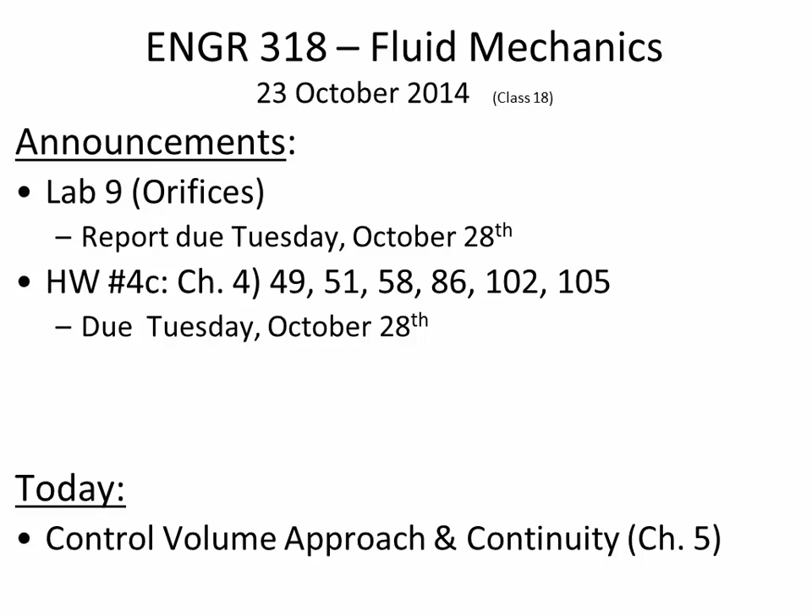And so Chapter 5 is also pretty important, and there's going to be different combinations of principles from Chapter 4 that will be combined with things from Chapter 5 to come up with interesting combo-type problems. So it's going to start to get a little more complicated and interesting, though nothing to be intimidated or scared by. It's just that we're going to have combo problems where you have to remember one chapter and integrate it with what is included in the next chapter.

All right. I don't think that we talked about this key idea slide from the last lecture; we didn't get to the last slide. So on the homework assignment you've got due on Tuesday, problem 51, there is a piezometer that's connected to a pipe that has a contracting section. We've talked about this extensively, and you've seen it in the lab, that a contracting section increases the velocity. So where the pipe diameter is wide, the velocity is 10 feet per second.

And the velocity here at the contracted section isn't known because they haven't told us the pipe diameters. If they'd said what the diameters were, then we could just calculate that velocity directly. But instead, we have piezometers measuring the piezometric pressure at both locations. Now, what would the water levels be if there was no water flowing through this pipe? If it was just static conditions, would there be a deflection like that? No. The deflection is only because water is flowing. If it was static, the water levels would be the same. So the fact that it's deflected tells us that the water is moving.

So the pressure here at the wide section is bigger than the pressure at the throat. And how do we know the pressure is higher at location 1 than at location 2? It's because the water level rises higher in that piezometer. These piezometers are an indication of how much pressure there is at a certain location. And so the process here is to combine the measured deflection between the two, along with the definition of piezometric pressure, into Bernoulli's equation.

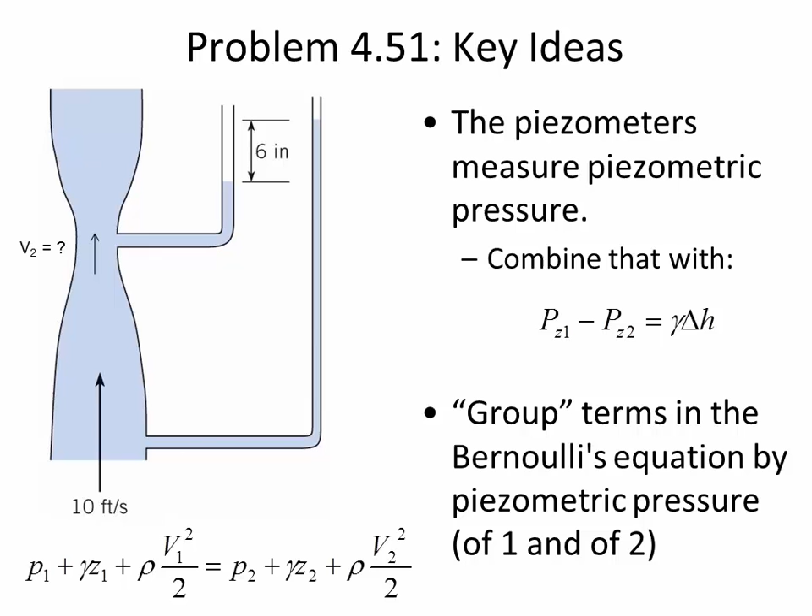All right. Here's an aerial photo of the fourth largest artificial reservoir in the United States. It's the Oahe Dam and the Oahe Reservoir. It's in South Dakota. The reservoir actually stretches more than 100 miles up the river. It sort of dams and pools a couple of rivers that converge together for quite a long distance, and it has a storage volume of 23 million acre feet.

We talk about units a lot in this class, but we haven't talked about an acre foot yet. What do you suppose an acre foot is measuring? Foot is a unit of length. What's an acre? It's area. So if you multiply length by area, what does that give you? Volume. So this is a measurement of volume, and what it says is if you had 23 million acres of area and there was 1 foot depth of water over that 23 million acres, that's how much water is in

this artificial reservoir. So this reservoir isn't 1 foot deep everywhere. Some places, like probably right at the dam, it's maybe 40 or 50 feet deep. Near the end of one of these little inlets here, it's probably just a few feet deep by the shore. So if you integrate the many different depths and consider the entire area of the reservoir, it's saying that the volume of that's 23 million acre feet.

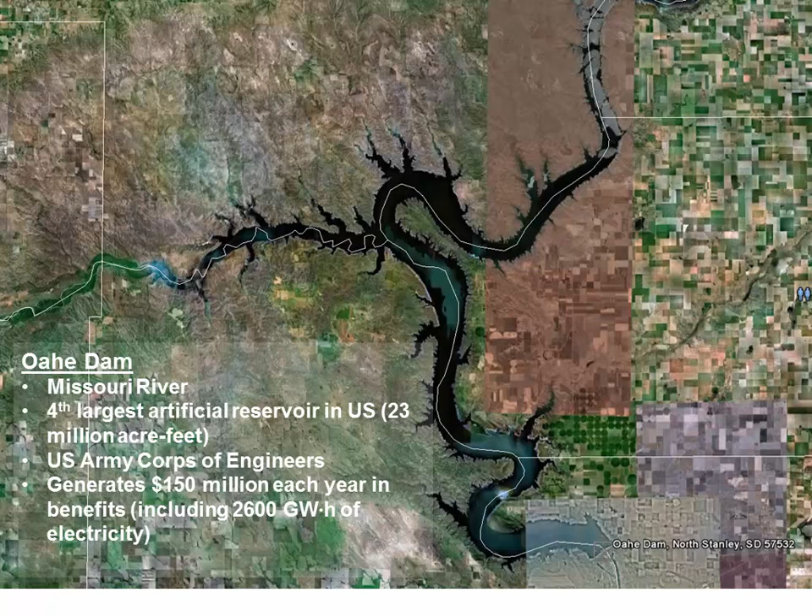Here's a close-up of the dam itself and some of the hydraulic structures they've built along with the dam. You can see here's the intake. The water going through the outlet, it's not like they just put a pipe right next to the soil on the dam. Do you have an idea of why they would not want the inlet, like a big pipe, right at the face? That's exactly it. If you've got the water going into that pipe at a really fast rate, then it could scour.

Let's draw it: here's the dam. The problem with having a pipe there is that the water would be entering from lots of different directions, and here's the water level. It could be coming across the face of that surface and creating sediment transport, which obviously is bad for safety. You don't want the dam to fail because the material was scoured. So what they do instead is just have a pipe sticking out into the lake. The intake that way doesn't cause any disturbance along the surface of the dam.

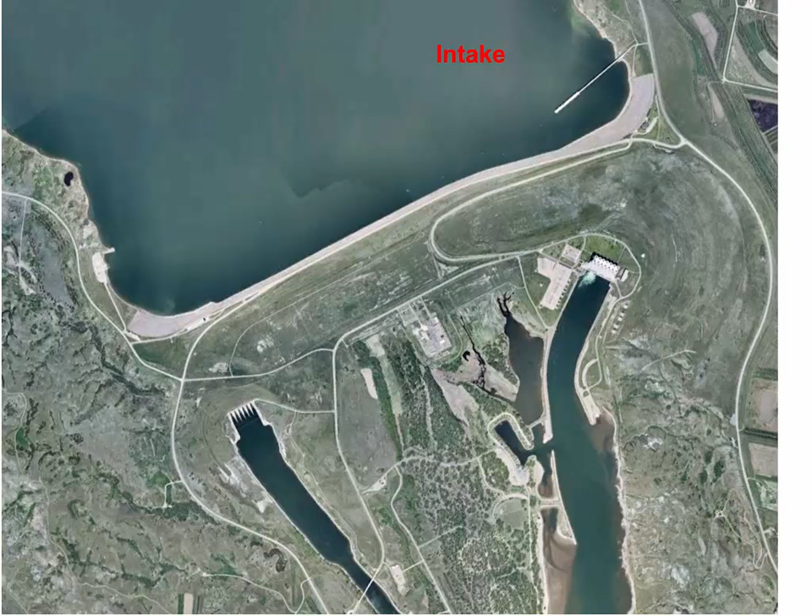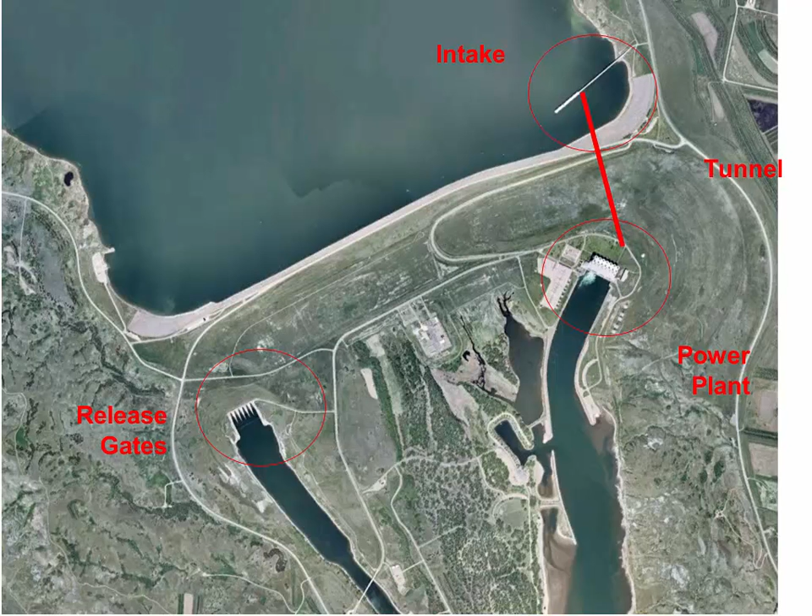There's an underground tunnel that goes through the dam to the power plant. Depending on how high the flow rate is, if there's so much water coming into the dam that they can't get it all through the power plant, sometimes they have to use these release gates. It's not an emergency release gate, but an overflow release gate. All of the water that comes through the release gates doesn't generate electricity. They only have power generation for the water getting through this power plant.

Here's a picture of the power plants themselves. There's a number of different turbines there. Let's watch what it looks like as water goes through the release gates, because they had a big event a couple of years ago, and they posted video online of water coming out of the spillways. If we're patient, we'll get to view that interesting footage. Wait for it. Now this clip is 9 minutes long.

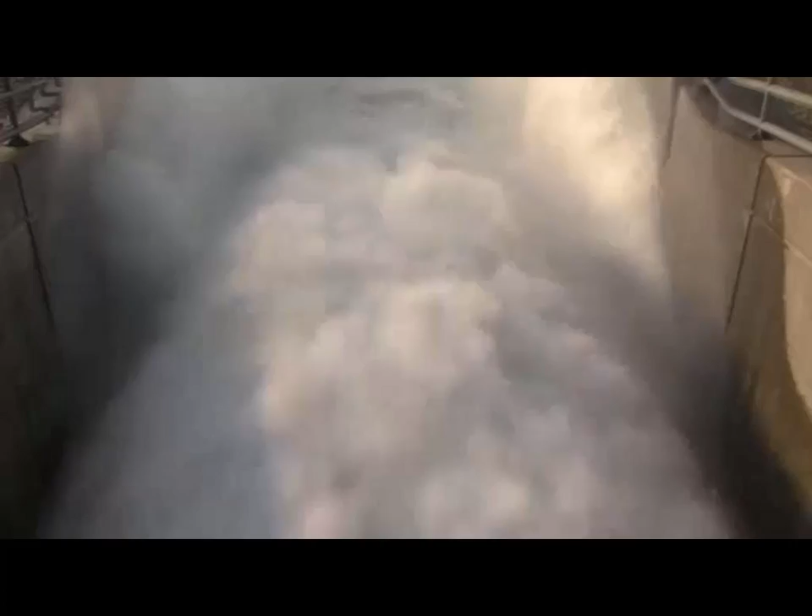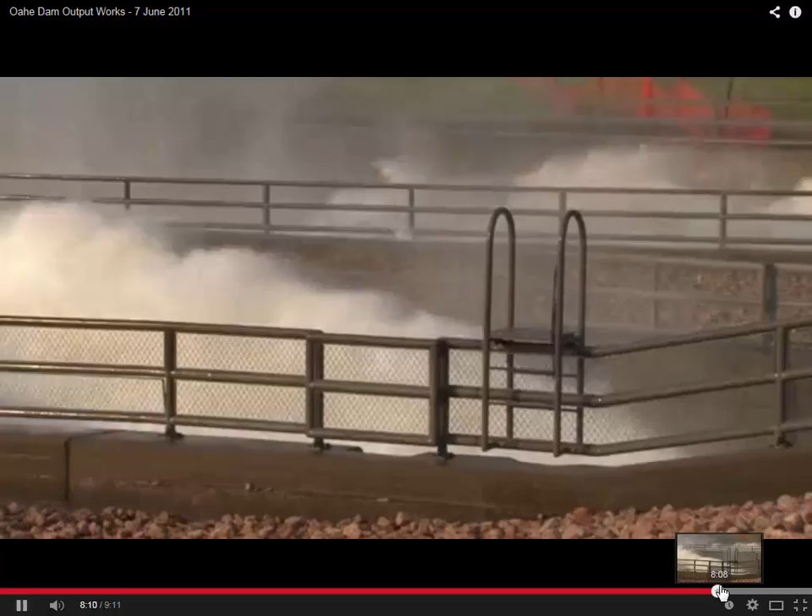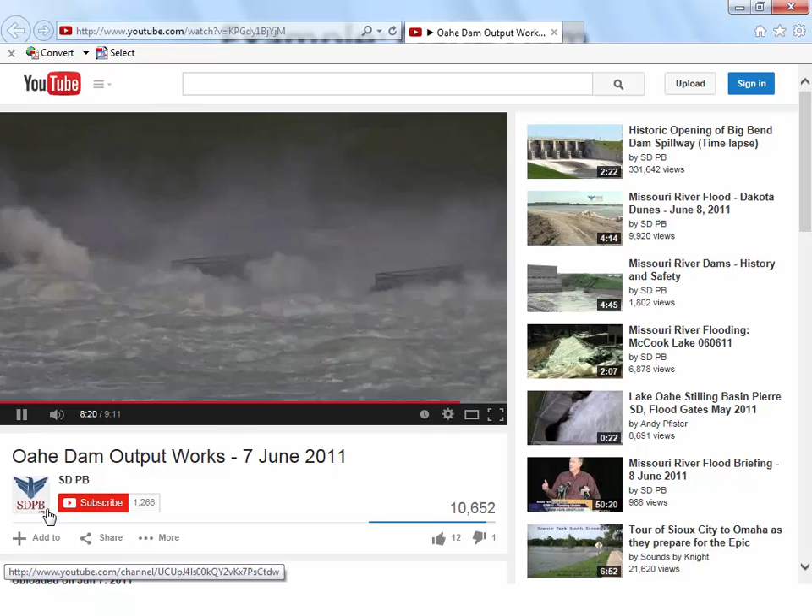Let's go through the calculations to see what the velocity actually is. So it was a special thing when they were using this for public, so that's why South Dakota Public Broadcasting put 9 minutes online. Well, let's check out this other link, because frankly I don't remember what the other link is. We also have this one.

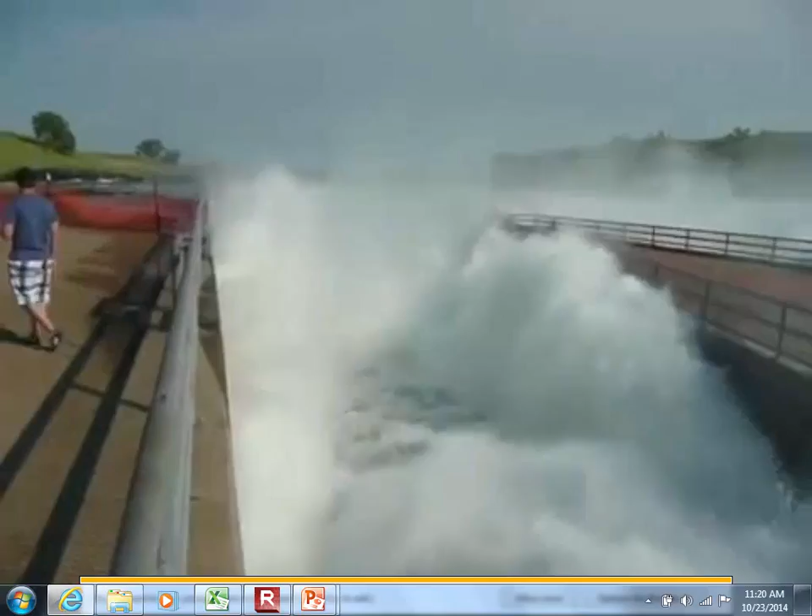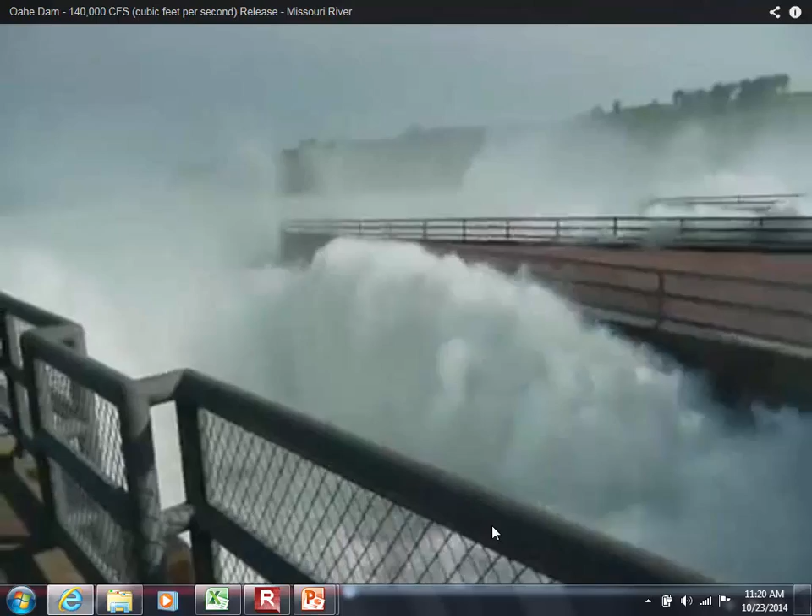Takeaway from that video. How fast though? What's the velocity through those gates? Well, how could we measure the velocity through the gates? We could use a stagnation tube. Remember when we talked about stagnation tubes? So how would a stagnation tube work there? You'd get maybe a PVC pipe or something, and you're standing on the edge, and if you put the PVC pipe down in, so here's the jet of water coming out.

If you put the PVC pipe down in like this, then the water level will rise to a certain height, and that certain height is dictated by the velocity of the flow. That would be one way of doing it, but for as fast as that water's moving, it would have to be a really big PVC pipe. It would probably be just awkward, and you'd put it in and it would shatter the pipe. It would just break right out of your hands. So that wouldn't work. So what's the upgrade from the stagnation tube that we talked about? What's that? Pitot tube, right.

So the pitot tube is the one that, instead of venting to the atmosphere, has an interior opening to capture the stagnation pressure, and then it has an opening. So here's the opening at 1, here's the opening at 2, and then it's connected to a gauge that says what's the pressure on a differential basis. And so we could actually use a pitot tube, put it down in there, and then measure what's the difference in pressure between 1 and 2. And then, using the formulas that were presented last time, we could measure the velocity that way.

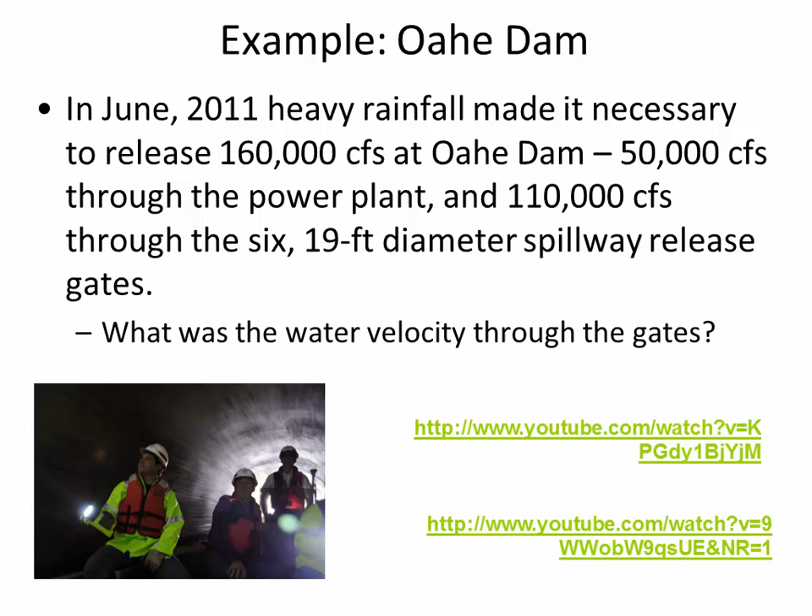The mass flow rate has different units. We're talking kilograms per second. And so if you have a volumetric flow rate and multiply that by the density of the liquid, then you have the mass flow rate. Mass flow rate is going to be really important when we get to chapter 6. This m dot means how many kilograms per second of the liquid is moving through the control surfaces. And the reason why it's important in chapter 6 is we're going to be doing problems related to momentum and calculating forces as jets are discharged.

And that's a whole different set of questions that we could do on this Oahe Dam, is how much concrete has to be in place in order to hold that pipe steady. Because if you've ever watched a fireman with a hose, they have to have several people holding onto the hose or else it'll go totally wild and spray all over the place. So much force is being generated when you discharge a liquid at a really high velocity like that. And it's related to the mass flow rate.

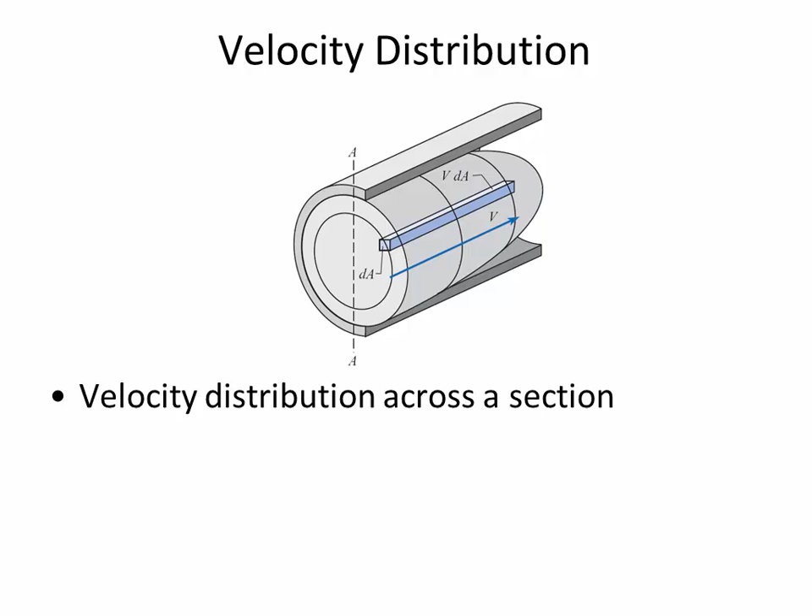So what we have in this diagram is a three-dimensional isometric view of a velocity distribution, similar to this cross-sectional view. And what you'll see is that this time they've broken the surface up into little differential areas, dA. So just consider what's the velocity at this one little area. And if you integrate that differential velocity over all of the areas, if you looked at all the different pieces that make up that surface, then you can find the volumetric flow rate.

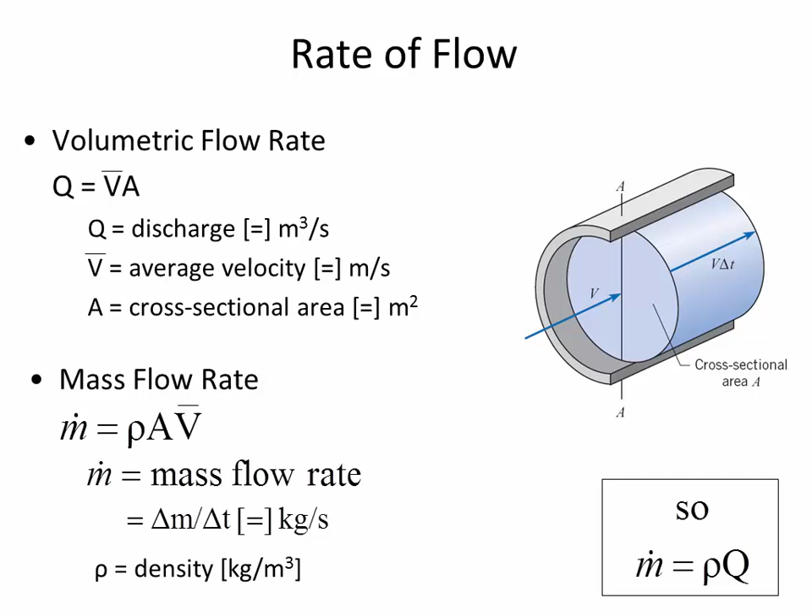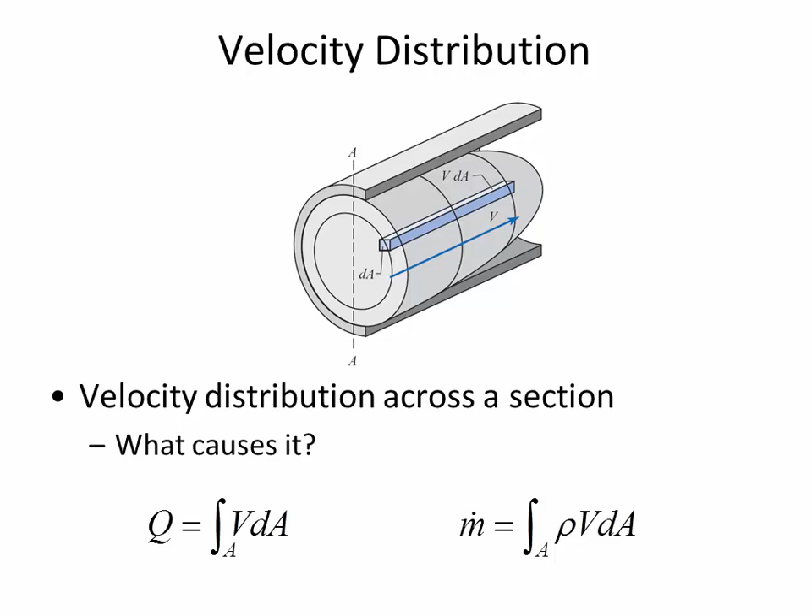And so there's not just movement sideways in turbulent flow, but the flow is also moving this way, and it may reflect off of the side of the wall, and some of it's going here. And every particle has its own individual flow path. This particle may be moving all over the place as it's finally making its way to the right. Once the flow gets above a Reynolds number of 4,000, then the velocity profile changes. What looked like a nice bullet-shaped parabolic profile where the centerline velocity is double the average gets to the point where the average velocity is pretty close to the velocity at any particular point.

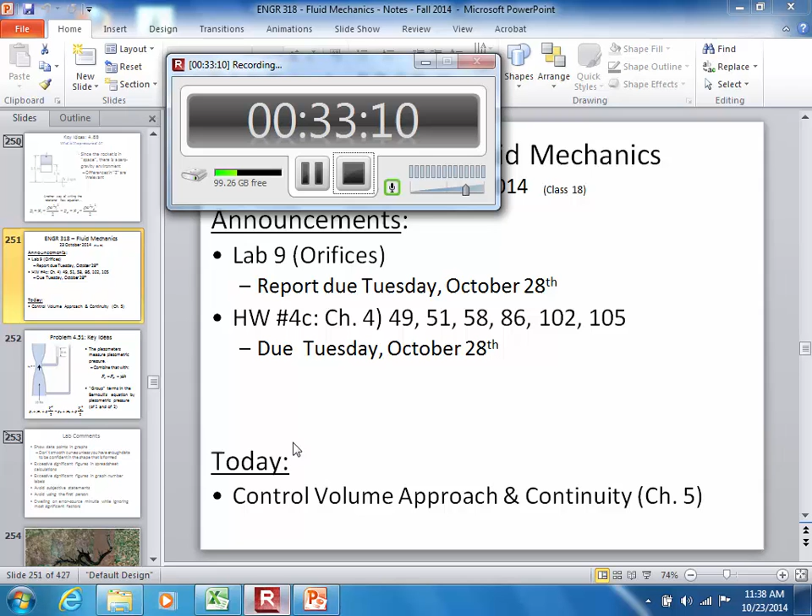We've got the diameter, so we can calculate the cross-sectional area of the pipe. Cross-sectional area is 0.196 square meters. The definition of the mass flow rate is the density times the area times the average velocity. So if we just rearrange that equation to solve for the average velocity, it's the mass flow rate divided by the density times area. And we know that the velocity ultimately should have units of length per time. So everything's going to have to cancel out for that to happen.

We've got 550 kilograms per second, and are dividing that by the density, which is kilograms per cubic meter. So the kilograms unit goes away. We've got meters cubed in the denominator due to the density, and then the area, meters squared. So that's going to leave us with meters in the denominator, which then, because it's in the denominator of the denominator, becomes numerator. So our velocity is 3.295 meters per second.

And then if we just substitute that into the volumetric flow rate equation, we find out that the volumetric flow rate is 0.647 cubic meters per second. Pretty easy stuff, right? Any questions about this one? All right.

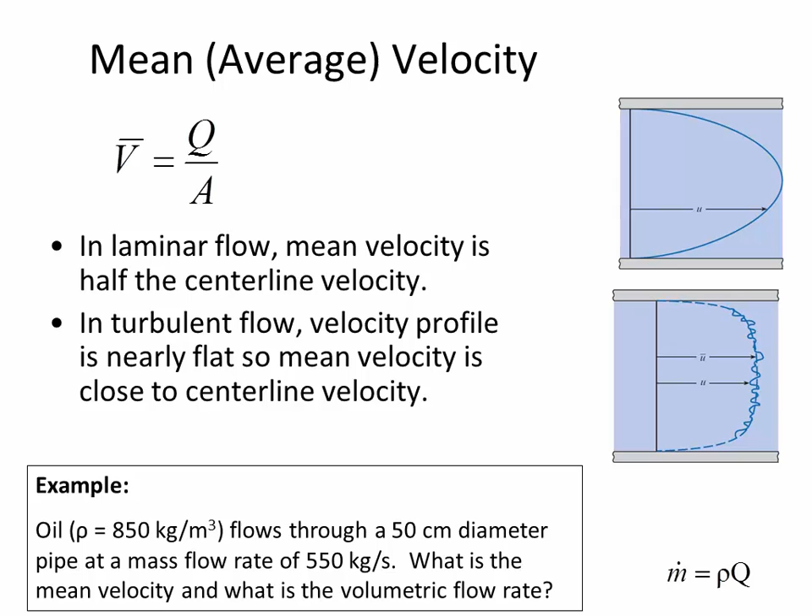So just with this, I mean, this is a chapter with one idea, and that's it. You know, volumetric flow rate. So you can really start digging into that homework at this point, even just with the very few examples we've looked at so far. Let's talk about the theory a little bit more, though. Let's dig into the details of what this control volume approach is.

The control volume approach says, what if there's a pipe? And you can see from the drawing here it's a bent pipe. And they did that on purpose just to illustrate the fact that it's okay if the flow is changing direction, and if the pipe diameter is changing, we can still use this method. This method isn't only applicable to like a horizontal pipe that has a constant diameter. This method handles any situation we can throw at it.

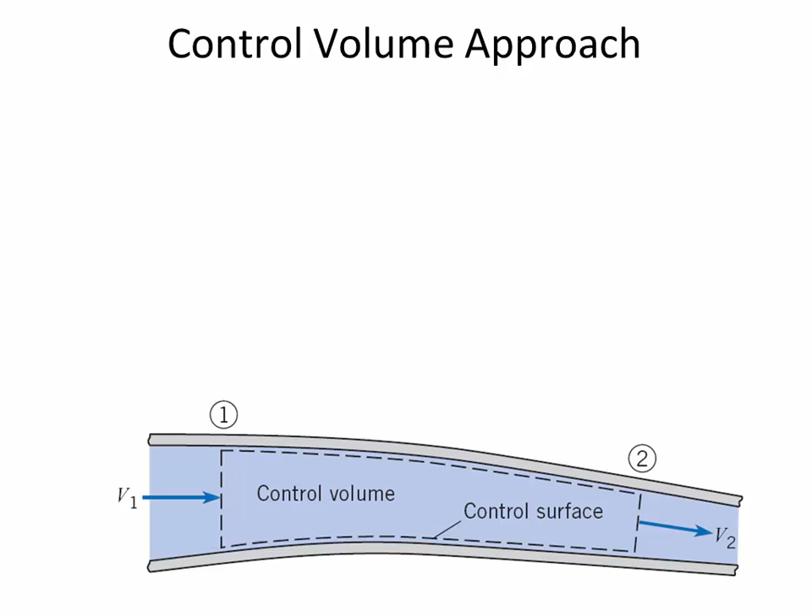There is a control surface, which is the outside of a control volume. This is a cross-sectional view of a pipe, and it's a circular pipe. And the control volume is like a sort of a misshapen cylinder. It's got a little bit of a bend in it. And the outside of that cylinder is the control surface.

There's a couple of important definitions that you need to be acquainted with. The system is the particles itself that's going to be flowing through this imaginary control volume. And for it to be a system, it has to be a continuously connected group of particles. The system can't be separated into two different groups when we apply the control volume approach like we're going to.

The control volume itself, it can change its location, its position and shape can change over time, it can rotate. It's just an imaginary object which the outside surface is bounded by this control surface. And the reason why we've come up with this imaginary object is it's just a unit of accounting.

We're going to look at what flows into this imaginary control volume, what flows out, and sometimes there's an opportunity for accumulation inside the control volume. Not in the case of this pipe. There's no place that water can be stored when it flows in. If it flows in, it has to flow out. Sometimes, though, we'll put a storage tank in between location 1 and location 2.

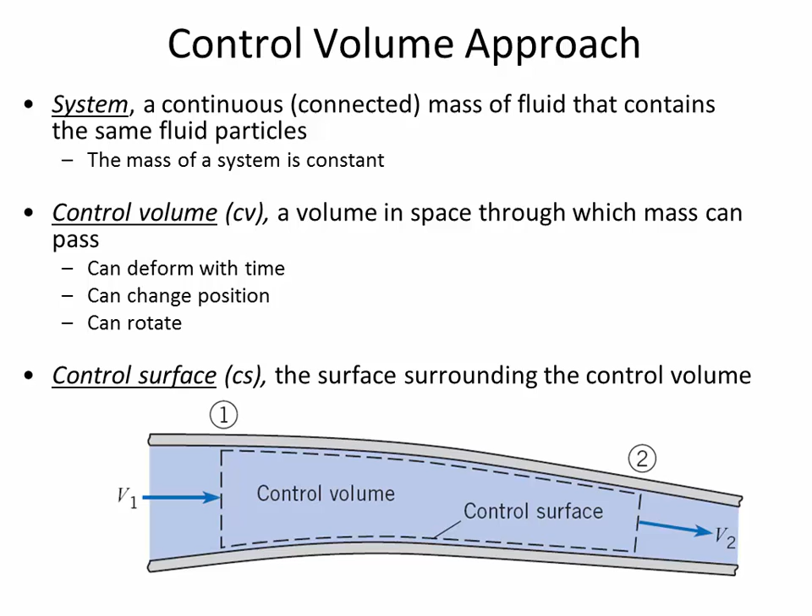Like I've mentioned before, the control surface, abbreviated CS, is just the outside surface of the control volume. So here's the application of how the control volume works. What we're looking at is a tank that's connected to an inlet pipe and an outlet pipe. And we're looking at this tank at two different times.

The picture at the left is what the tank looked like at time t, and the picture on the right is the same tank just a little while later at time t plus delta t. There's two different liquids here. There is a dark blue liquid, which we could think of, maybe it's oil and it's surrounded by a different liquid, or maybe it's water that has a tracer injected to it.

But the system is just this dark blue water here that's representing a certain amount of particles that are being tracked over time. So look at where the system is at time t, and now look at where the system is at time t plus delta t. Now, I know it's not very obvious, but does it look like the liquid surface is the same in the two tanks, or does it look like it's different? Looks like this one on the right's a little bit lower.

I agree. Now, the other difference is look at how long this is compared to how long that is. The one on the right, where the system is in the outflow section of the tank, through that outflow pipe, there's more of the system in the outflow pipe. And that's why the liquid level is lower on the tank on the right, is that more of the system has exited the storage area, this control volume that bounds the tank. More of the system has flowed out of the control volume.

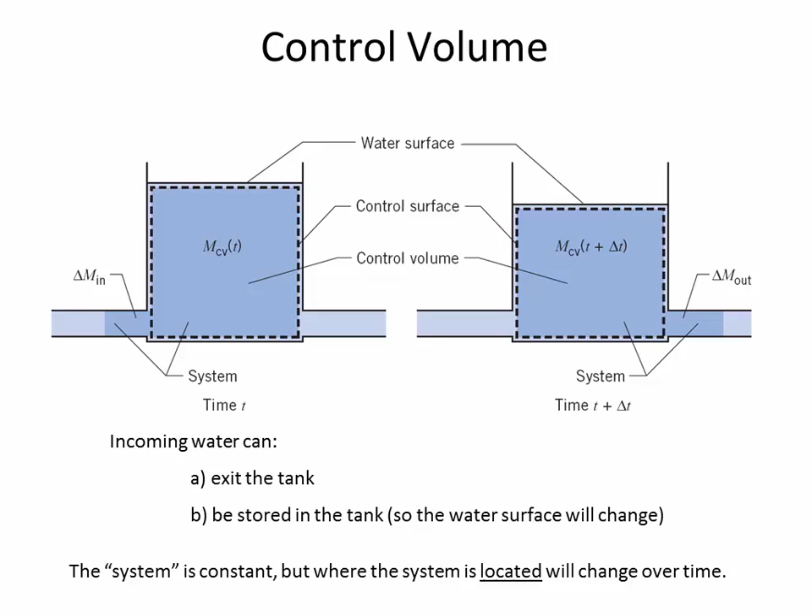So in symbolic language, what it says is that the mass of the system at time t is how much is in the control volume and the amount that's in the inflow pipe. And then at time t plus delta t, it was the amount that was in the control volume and how much was in the outflow pipe. So the system changed its location over time. And the net accumulation in the control volume, the change in mass that was inside this control volume, is accounted for by the flow in and the flow out.

So the change in mass over time is related to the mass flow rate in and the mass flow rate out. Remember m dot, mass flow rate, the definition of that is it's just the density of the liquid times the volumetric flow rate, where the volumetric flow rate is the area times the average velocity.

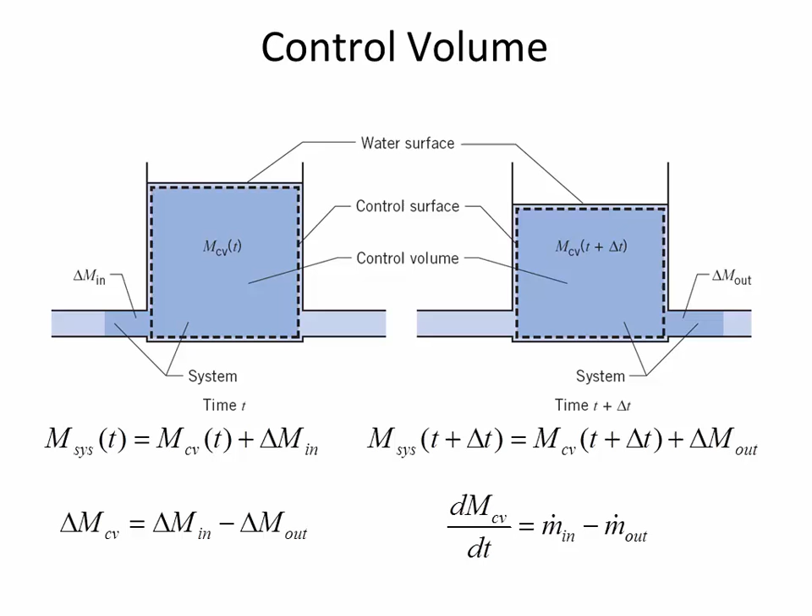There's a few more definitions in the textbook that I hope that you've seen already as you're reading in the textbook, but we'll just identify that some properties of fluid are related to how much of it there is, how much fluid is present. And some properties are independent of the amount of fluid that's present. So let's start with the easy ones, the intensive properties.

An intensive property of a fluid means it doesn't matter how much is actually there. So the color of a fluid is a good example of something that it doesn't matter if there's a little bit of a fluid or a lot of the fluid, it's going to have the same color. The water in the bench on the right that's tinted blue, because remember we were injecting all that dye into it during the flow visualization experiment, it has that same color of blue whether there's a liter of it or 20 liters of it. You know, maybe it's more noticeable if there's more water, but it has the same color.

That liquid has the same viscosity. It doesn't matter what mass is present. Intensive properties stay the same. But there are some properties that fluids have that vary as a function of how much of it there is. And so one that's obvious is mass. The mass of the fluid is related to how much mass is present. That's obvious. But other ones that are less obvious is the momentum of the fluid depends on how much mass is present in the fluid in the system. How big is the system is going to dictate the amount of momentum.

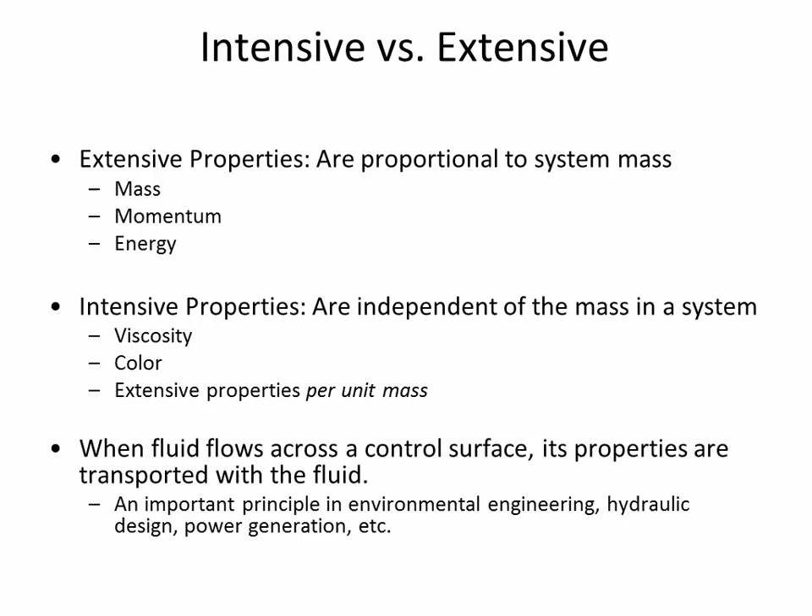When the fluid is moving around and we do this accounting procedure of tracking the flow into the control volume through the control surface and the flow out of the control volume through the control surface, the properties are transported along with the fluid. So the water exits the reservoir, it's taking energy with it because that is an extensive property, and the energy that's in that fast-moving water that's pressurized gets moved around through the control surface. This is what we call the Reynolds transport theorem, and this is just a really fancy, complicated way of describing this simple principle. Accumulation is in minus out.

We can break Reynolds transport theorem into two different terms. There's a storage term and a transport term. What the storage term says is consider that tank that we were just looking at a minute ago, the tank where liquid is accumulating, flowing in and flowing out. Okay, so take this tank for instance, and we're going to have control volumes and control surfaces. So here's our control surface. It's the outside of the control volume, and then the control volume is the interior part that is within the control surface.

If you keep track of the flow through the control surfaces, the transport is the in and the out. So you can write in the margins there of your paper, transport is in and out. So it's the right-hand side of this very simple accumulation equals in minus out. So how do we read this language here? It's saying take the integral through the control surfaces.